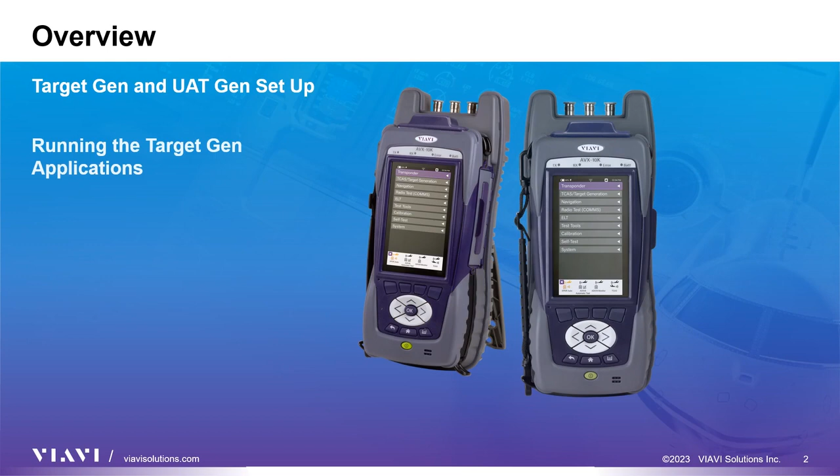In this video, we will be discussing the settings and procedures for both target gen, which is generating targets at 1090 MHz, and UAT gen, which is generating targets at 978 MHz. We will look at saving custom scenarios. We will also look at saving test generator parameters and viewing the results.

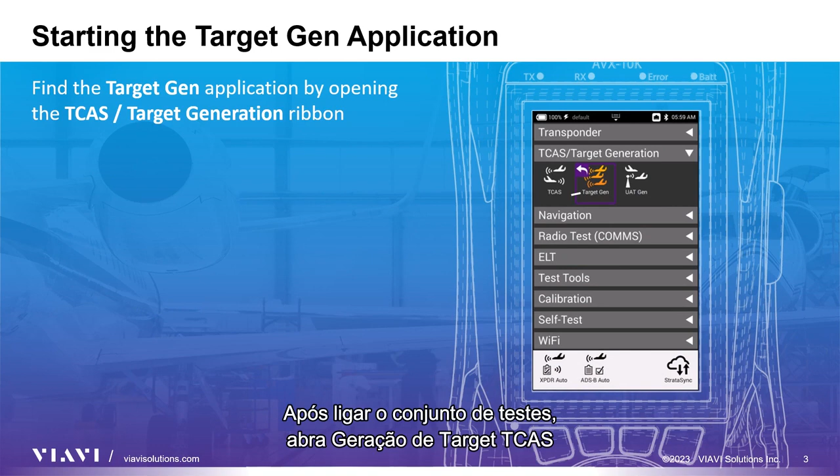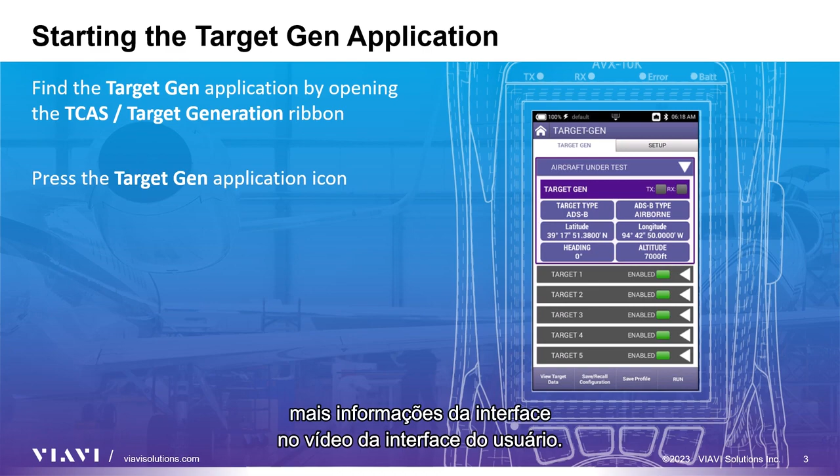Let's look first at the target gen application. After turning on your test set, open the TCAS target generation ribbon and select the target gen application. Icons can be moved around within each ribbon. You can learn more about that and other interface information in our user interface video.

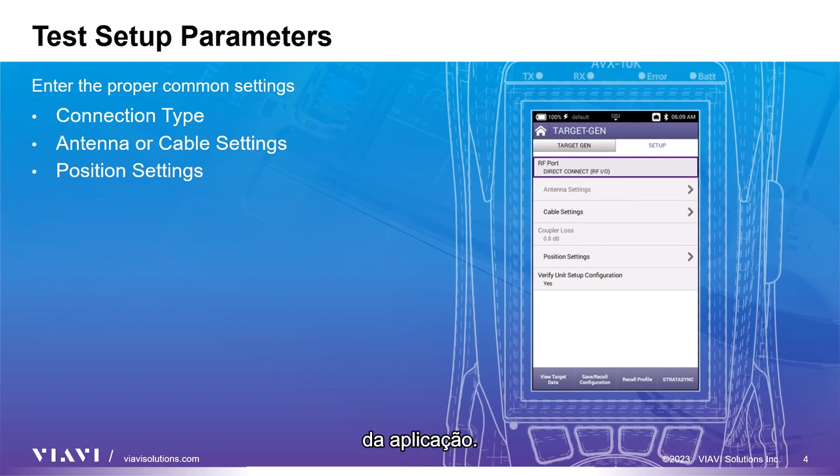There are no unique test setup parameters for target generation, however, there are several modifiable parameters on the main page of the application. As a reminder, the common test setup parameters, like connection type, antenna or cable settings and position settings, have all been covered in our video titled Common Test Settings and General Preferences.

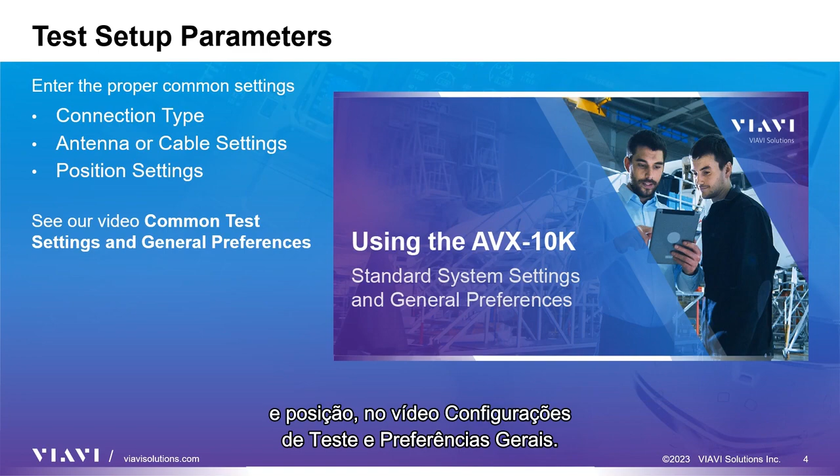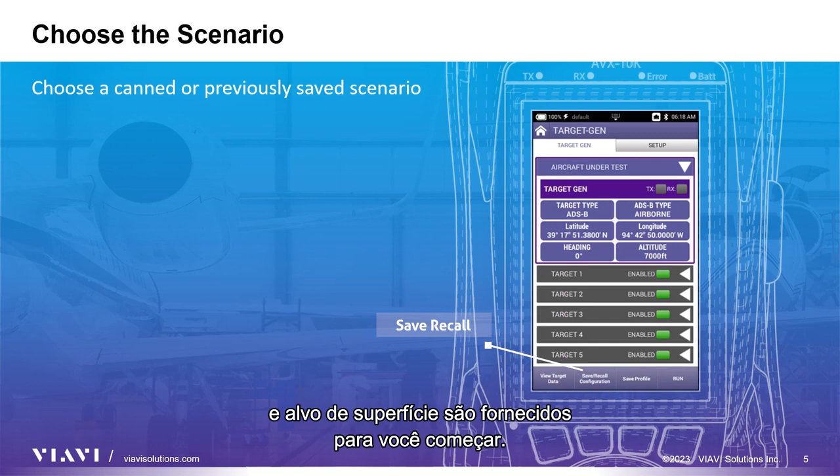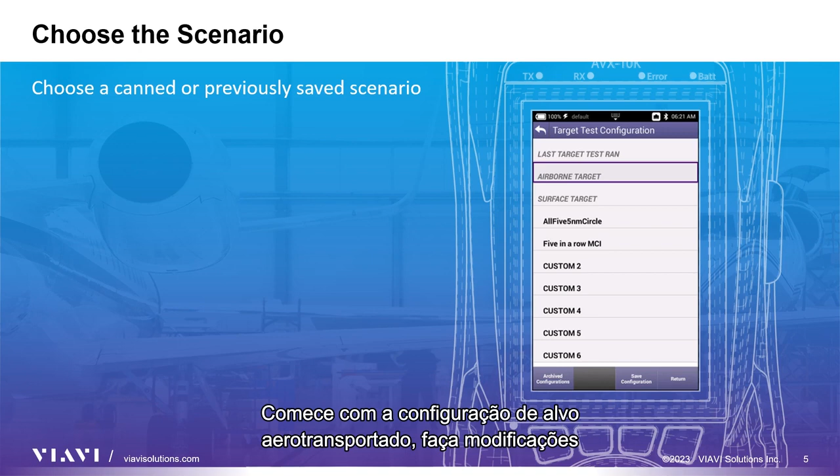The first step is to generate a scenario, and like the TCAS application, some canned scenarios, airborne target and surface target, are provided to get you started. 7 custom scenarios can also be saved. Press the Save Recall Configuration button to view the provided scenarios. The suggested approach is to start with the airborne target configuration, make modifications to fit your needs, and then save the configuration.

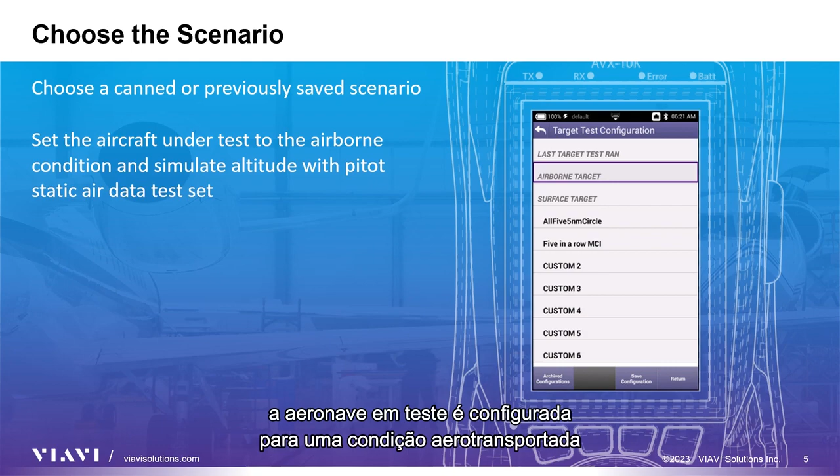Before running a test scenario, the aircraft under test needs to be set to an airborne condition and altitude needs to be simulated using an air data test set.

In order to generate audible resolution advisories, you will need to leverage the Viavi GPSG-1000, or similar, and simulate a flight path through the generated targets.

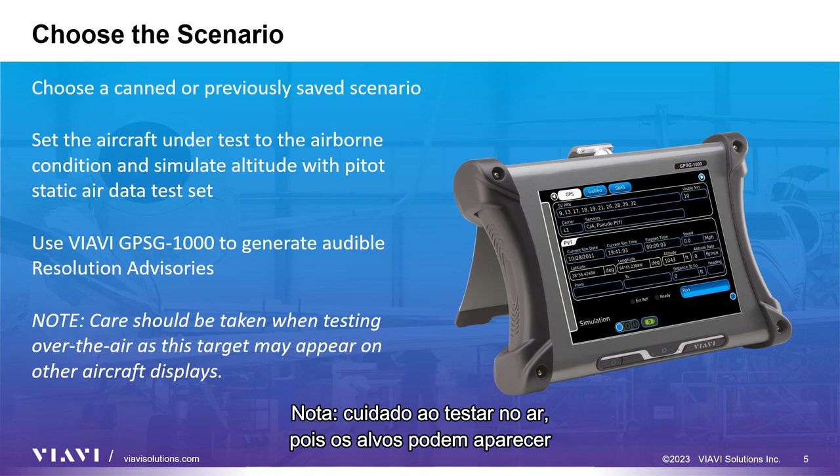Note, care should be taken when testing over the air, as targets may appear on other aircraft displays.

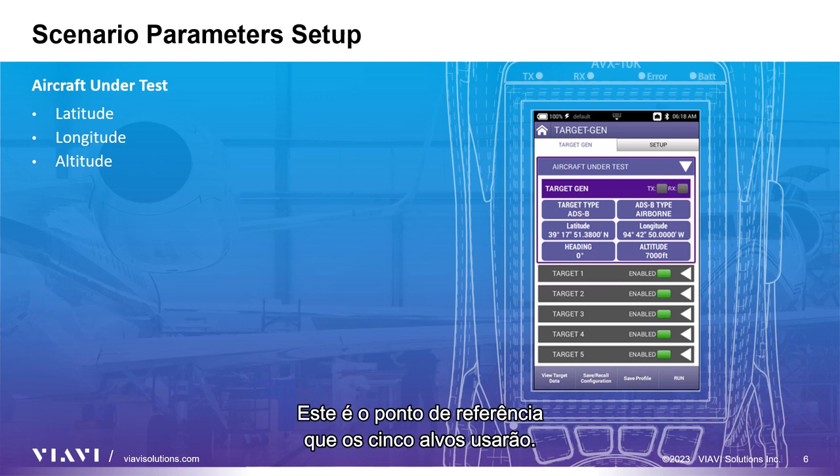Once a scenario has been loaded, any of the values displayed with a blue background can be changed as desired. Enter the latitude, longitude, and altitude of the aircraft under test. This is the reference point that the 5 targets will be using.

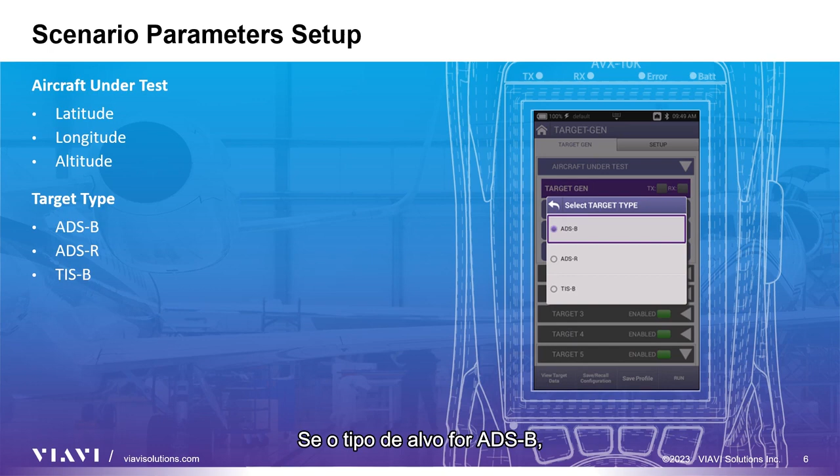Target type can be set to ADS-B, ADS-R and TIS-B. If target type is ADS-B, the ADS-B type can be toggled between airborne and surface.

Now you can set each of the target's bearing, range, and altitude values to place and point targets towards the flight path of the aircraft under test. All values are referenced from the aircraft under test location and height.

Targets can be enabled and disabled by clicking on the green or red indicator. Again, please note, care should be taken when testing over the air, as these targets may appear on other aircraft displays.

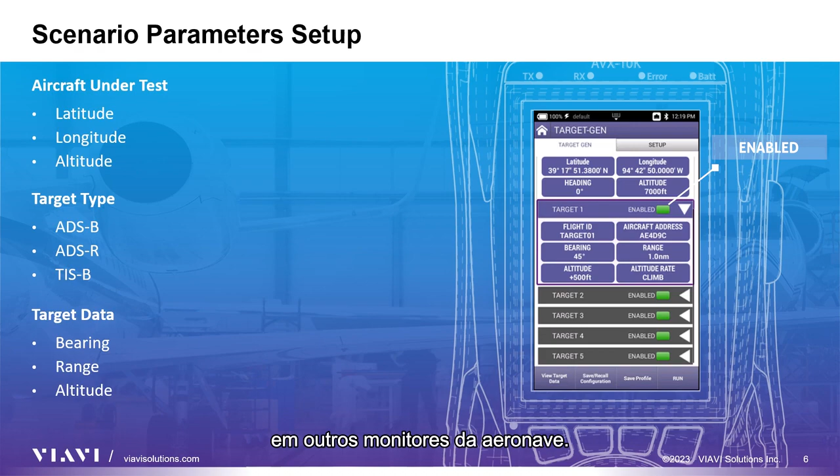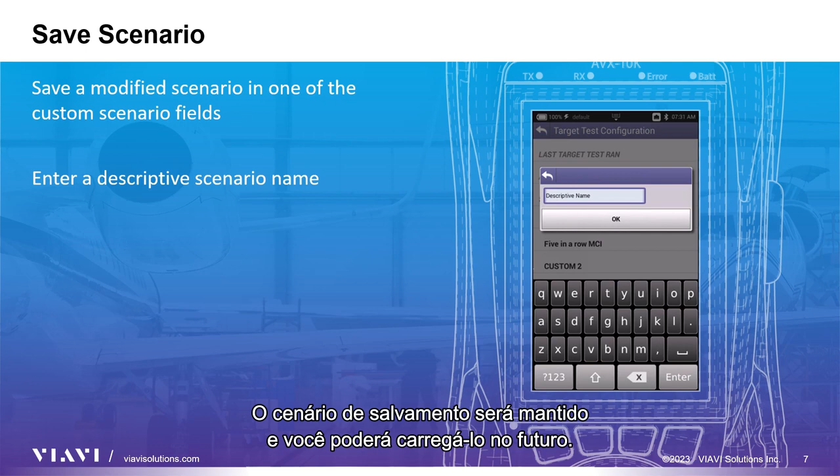If you have modified a canned scenario and wish to save it, click on the Save Configuration button, scroll down to one of the custom fields and click on one to enter the name for your new scenario. Once that is entered, click the Save Configuration soft key. The saved scenario will be retained, and you can load it anytime in the future.

Click the View Target Data button to review your target configuration information. Once everything is set up, press the Run key to start the scenario.

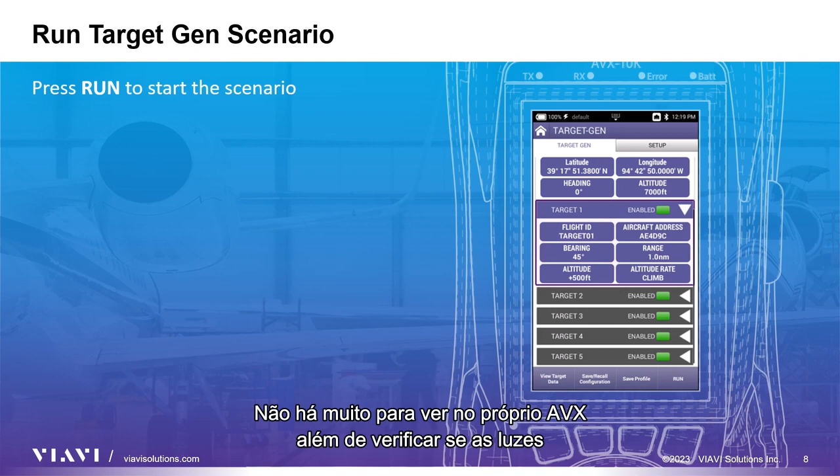If the aircraft is configured properly, all targets should be displayed on the aircraft under test. There is not much to see on the AVX itself, other than to verify that the transmit and received lights are flashing. Once satisfied that the aircraft unit under test is operational, press Stop to complete the test.

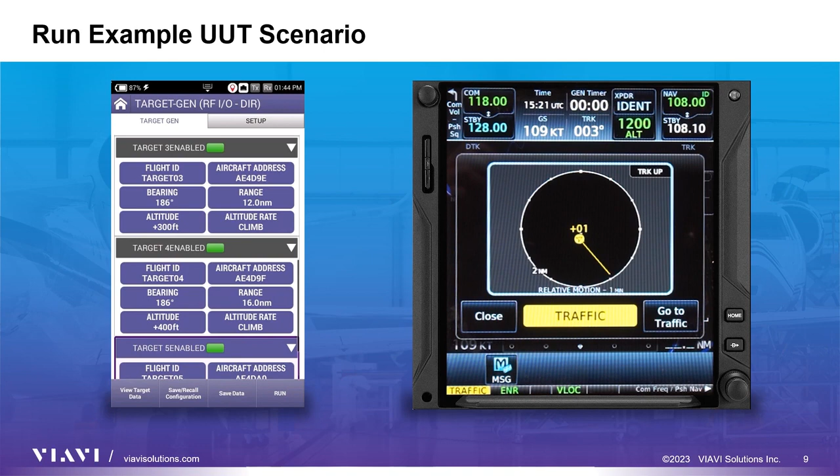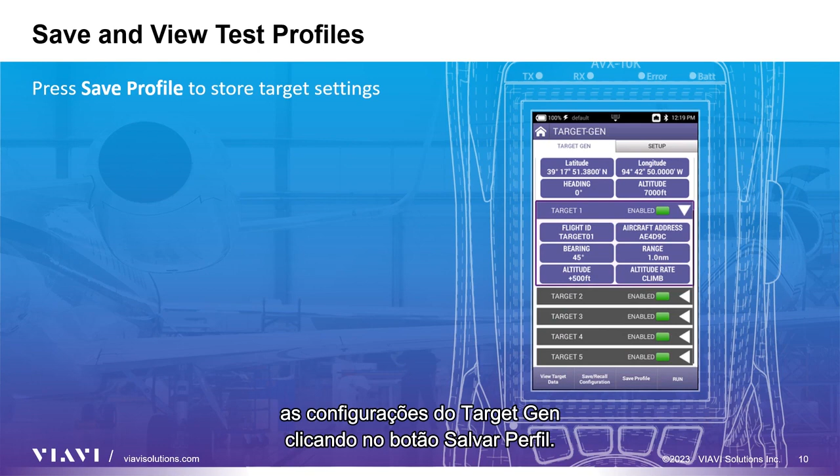If desired, you can save the target gen settings by clicking the Save Profile button. Files can be synced to StrataSync and can be viewed locally by swiping down on the system tray at the top and clicking on View Reports.

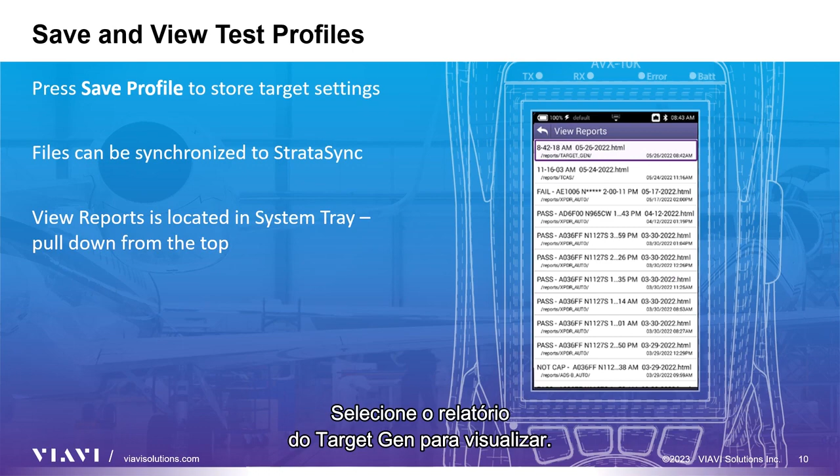Select the target gen report to view. The information saved here is the data used to generate the scenario.

Now let's look at the UAT gen application. With the AVX-10K power on, click on the UAT gen application in the TCAS target generation ribbon.

This application is similar to the target gen application, and all setup parameters have been covered in the Common Test Settings and General Preferences video.

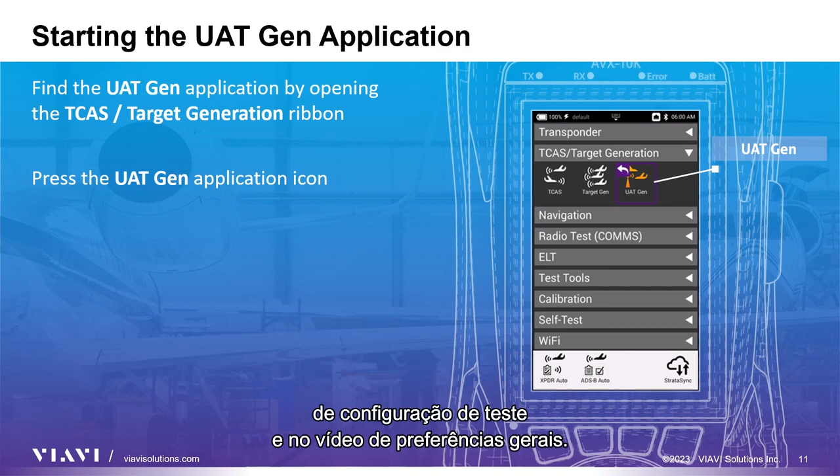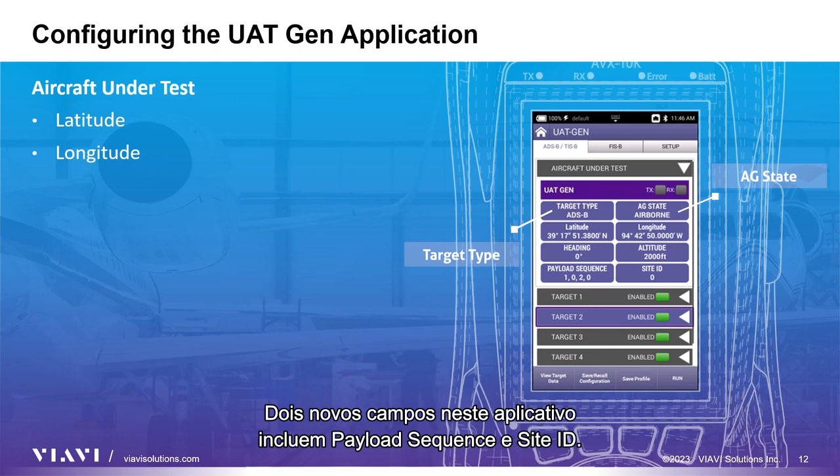For configuring the scenario, target type can be toggled between ADS-B and TIS-B, and air-ground state can be toggled between air and ground. Two new fields in this application include payload sequence and site ID. The default settings should work fine, but these can be modified to suit your needs as well.

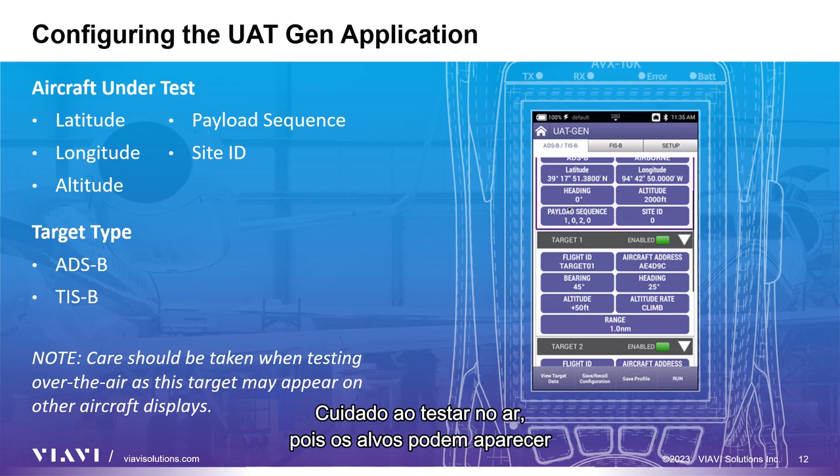Complete each target's bearing, heading, and altitude as required. Once again, please note that care should be taken when testing over the air, as these targets may appear on other aircraft displays. Once everything is set up, press the run key to start the scenario.

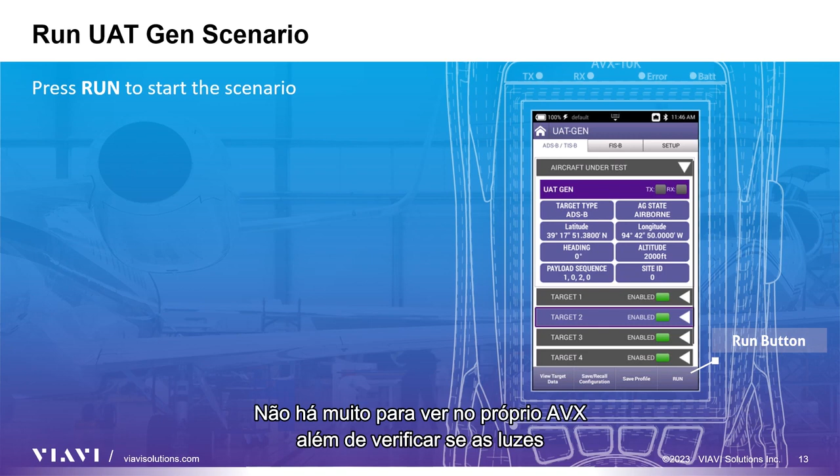If the aircraft is configured properly, all targets should be displayed on the aircraft under test. Again, there is not much to see on the AVX itself, other than to verify that the transmit and received lights are flashing. Once satisfied that the aircraft unit under test is operational, press stop to complete the test.

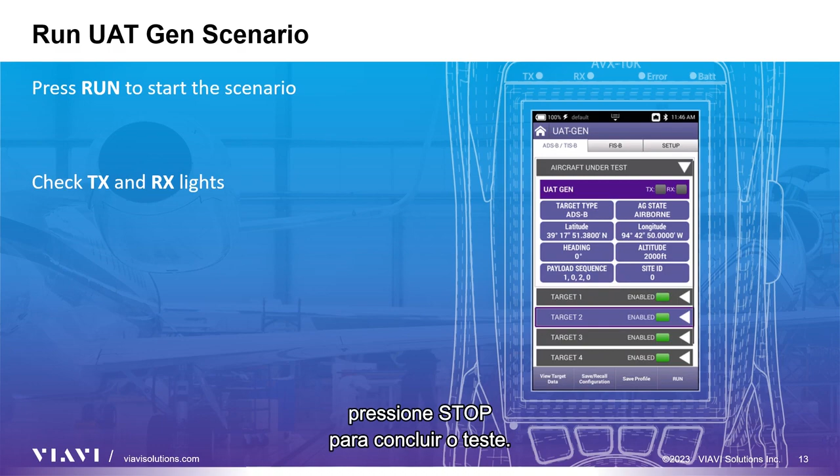For UAT equipment, the FIS-B data can also be tested. Click on the FIS-B tab and set your transmitted FIS-B information according to your needs.

The report field can be toggled between METAR and TAF. Set your day, time, station, and slot ID as needed.

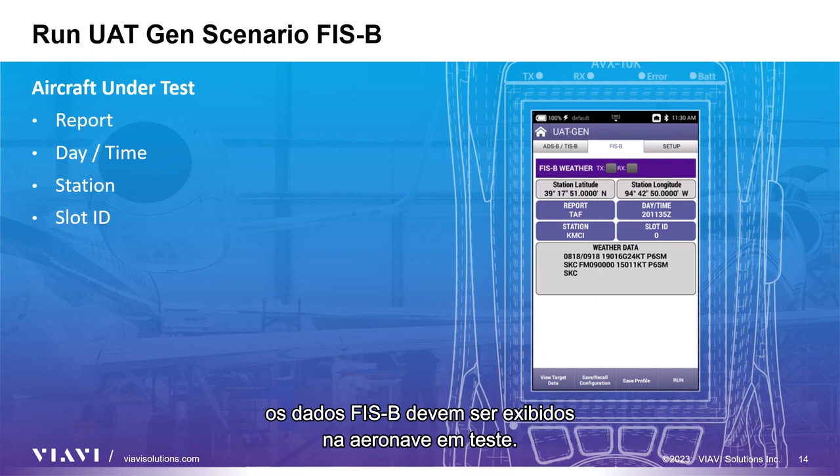Once everything is set up, press the run key to start the scenario. If the aircraft is configured properly, the FIS-B data should be displayed on the aircraft under test. Once satisfied that the aircraft unit under test is operational, press stop to complete the test.

Saving data and viewing reports works the same way as the Target Gen application.